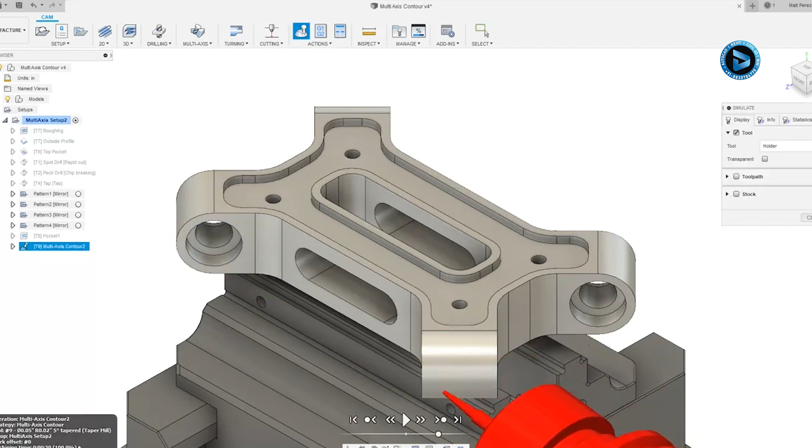Because of this specific area, you'll notice that the holder goes right through the part, and as it rotates around, we're also hitting the fixture. Now, while the fixture was defined inside of our setup, it's not necessarily going to be used for collision checking. While the fixture was created inside of our multi-axis setup 2, and it is able to see a collision between the holder and the fixture, the functionality we're going to take a look at now is not going to avoid fixture collisions.

But for this, we want to go into our toolpath once more, and on the Tools section, we want to go to Shaft and Holder. There are multiple types in here, such as trimmed, detect tool length, and fail on collision. And for our purposes, we want to use trimmed, and notice that we have a holder clearance of 0.2 inches and a shaft clearance of 0.04. If we say OK, it'll recalculate this toolpath, and now it should keep the holder at least 0.2 inches away from our part at all times.

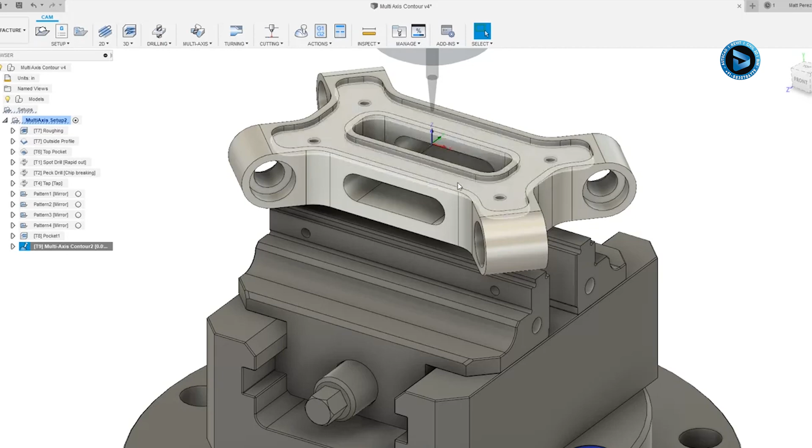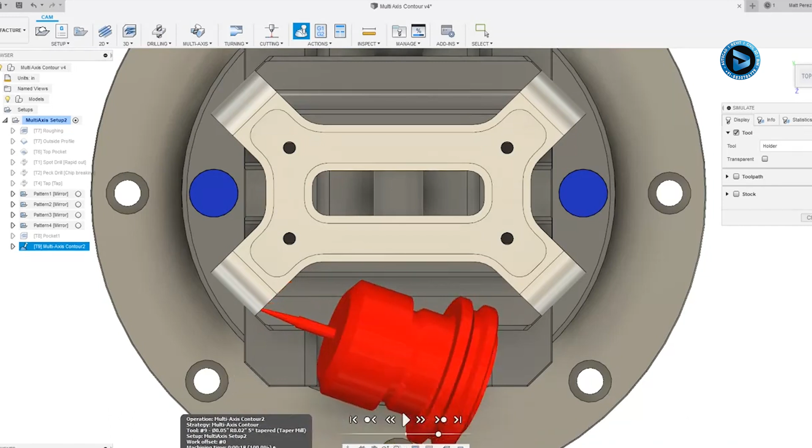Now that the toolpath is calculated, let's go ahead and simulate this. I'm going to view it from the top. I'm going to manually drag through the playback. And notice that the holder never gets anywhere close enough to touch our part. Because of that 0.2 clearance, it's keeping it away, but again, it is still colliding with the fixture. So as we rotate around, you can see that the holder itself collides with the fixture. And we need to manually control this collision by utilizing some of our maximum tilt angle values and using those options to help avoid the fixture itself.

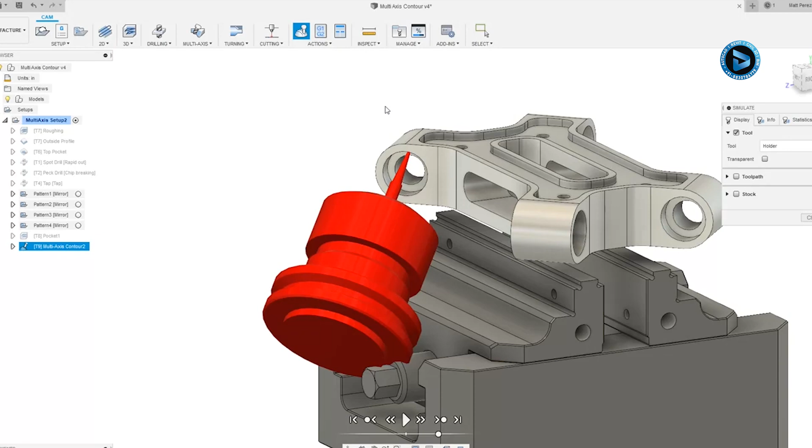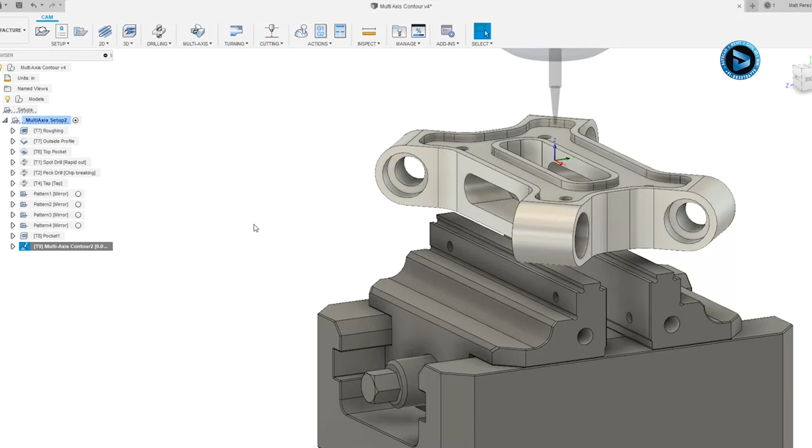So now in this case, using the option for shaft and holder clearance allows us to continue to machine all the way around the part, but it allows us to do that without hitting the part itself. We can come back into the maximum tilt value and we can change this to 90 degrees. And of course, in reality, to clean up this edge, multi-axis positioning would be a great option rather than doing a simultaneous multi-axis contour. But again, the purposes of our videos are to make sure that we can learn and understand the tools that we have available.

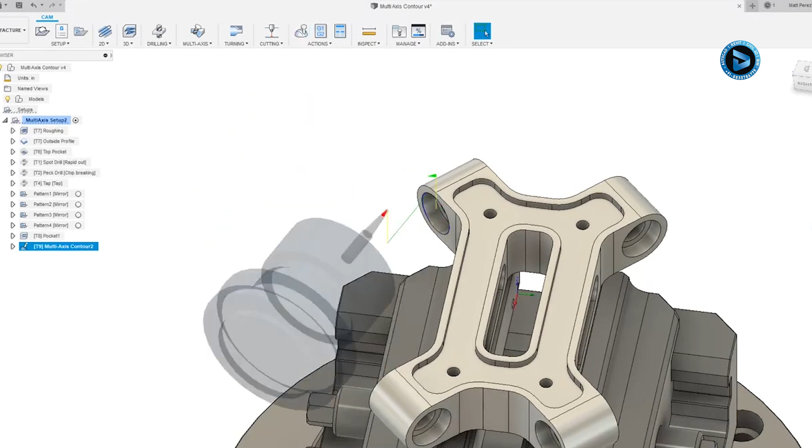So again, here you can see that we are 0.2 away. It's coming in and it's cleaning up this edge using that maximum tilt value of 90 degrees. It's now not able to get all the way into the upper section of this edge, so we will have to modify those angles to get a little bit higher up into that contour.

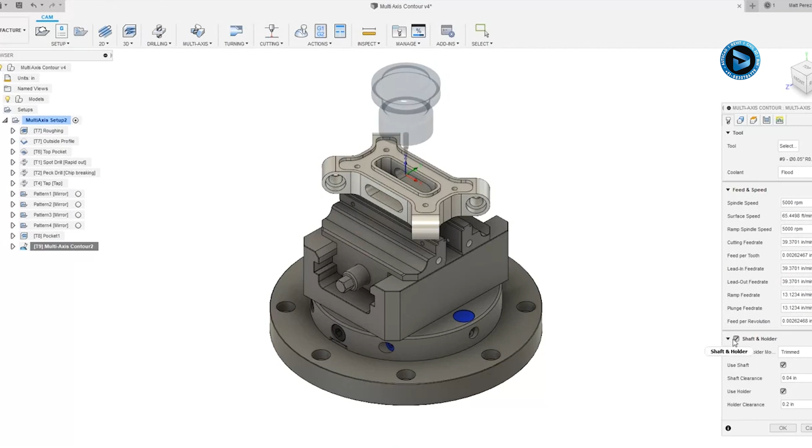But this has been a look at our multi-axis contour toolpath and all of the options that we've explored. For a quick reminder, we took a look at shaft and holder clearances. We made our selection here and we didn't modify anything such as tool orientation, but we took a long look at all of the options inside of our passes section. We changed the cutting mode as well as the sideways compensation. We took a look at the axial offset, the pass overlap, and the tilts in the forward and sideways directions, as well as the min and max tilt values.

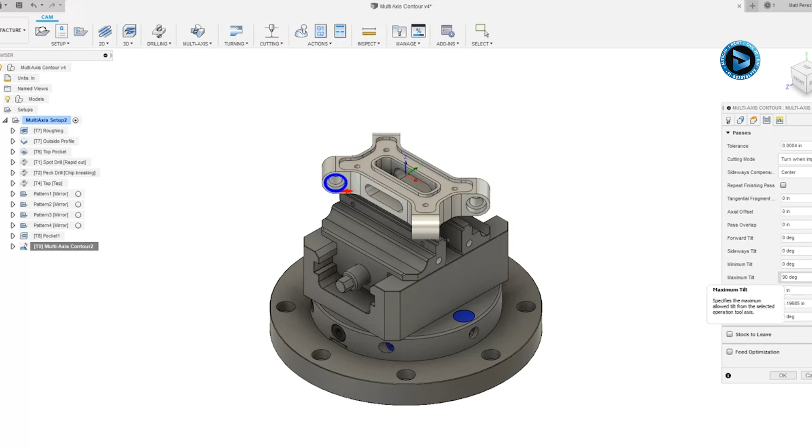You can use all these options to help you create these multi-axis simultaneous contours and help you clean up some of the edges of your complex parts. For our purposes, let's go ahead and save this file before we move on to the next step.